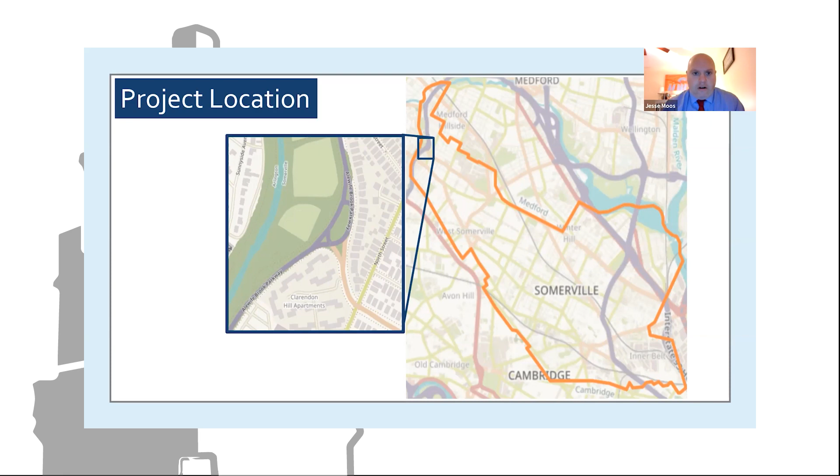This project is as far west as you possibly can get in the city. The limits of it are basically the intersection of Alewife Brook Parkway and Powderhouse Boulevard, but it'll run all the way to North Street as well.

Let's talk about how we get to construction. So everything comes up, we have to have a plan or an idea. We started conceptualizing this back in late 2020.

We had an idea of what we wanted to do, but we needed to get feedback and engage the community. So our mobility team did a few pop-ups throughout 2021, trying to get ideas of how best we could serve this community - not just the people who live around this intersection, but people who really use this as a gateway to Arlington, or if you're coming from Arlington into the city.

We had a community meeting back on July 21st, talking about design, and then the mobility team also did some informational pop-ups later in 2022. And finally, here we are today in February with our construction kickoff community meeting.

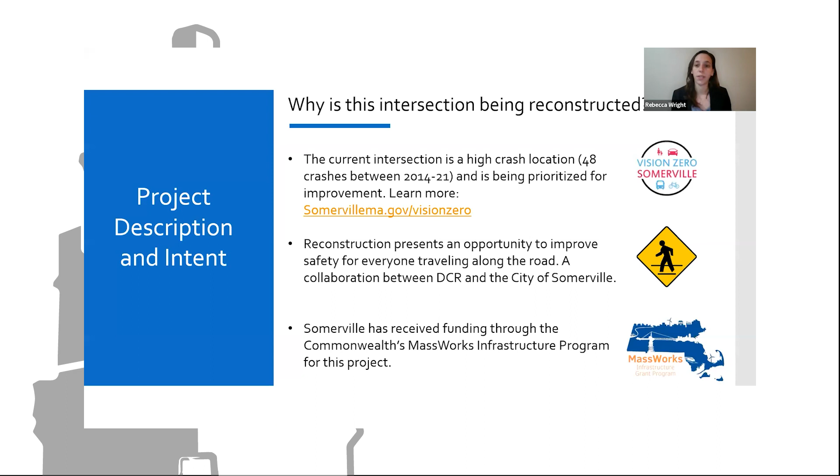This project is funded by the MassWorks grant, so this is not just city funded, we got state funding. This is a really great opportunity for the city to get money from the state and improve our city streets.

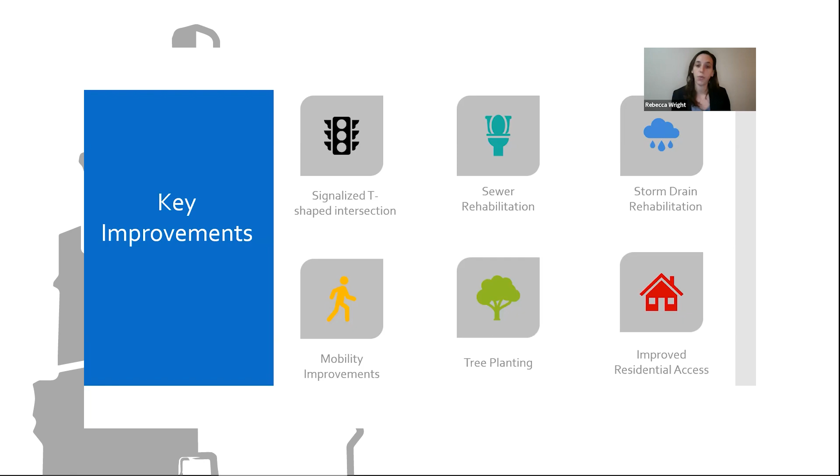The project includes a number of different key improvements: a new signalized intersection, sewer and storm drain rehab, mobility improvements, tree planting, and a new improved residential access roadway.

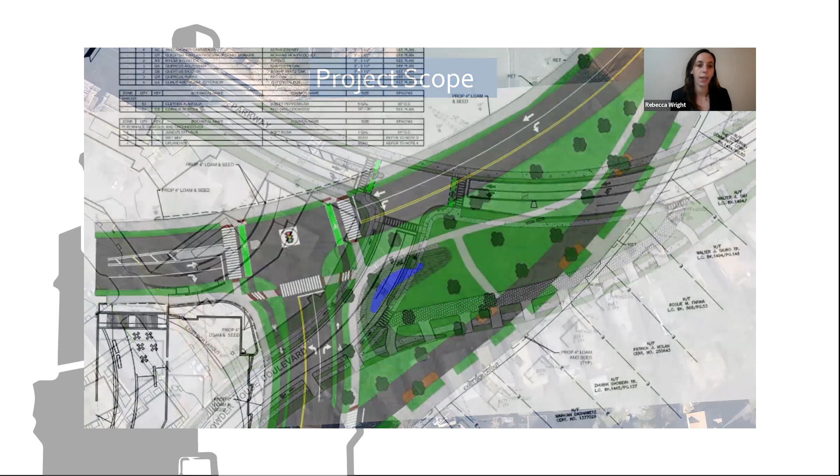I'm really excited about this slide, I put a lot of time into it, and I hope it'll help clear things up for everybody on this call. We have this new residential roadway, which is really a yield street, pretty common in the city of Somerville - you have to stop and pull over and yield for oncoming traffic and take turns.

It is a dead end road for only emergency and service vehicles. Really the only people accessing this roadway are the residents on this road to get in and out of their driveways. This is supposed to be a safe, slower access residential road - anybody using it is really only emergency and service vehicles.

We have these chicanes, which is a traffic safety measure. It's trying to make people slow down and take some turns rather than a straight shot. It's another safety measure, so people slow down on this residential shared street.

We have this raised crossing, which is for pedestrians. From the get-go entering this street, you slow down, and really if you think you're going to bypass the traffic signal to get to Alewife Brook Parkway, you're not saving any time. These safety measures are put into place to slow people down, and it's not a through street by any means - it's a safe residential shared street.

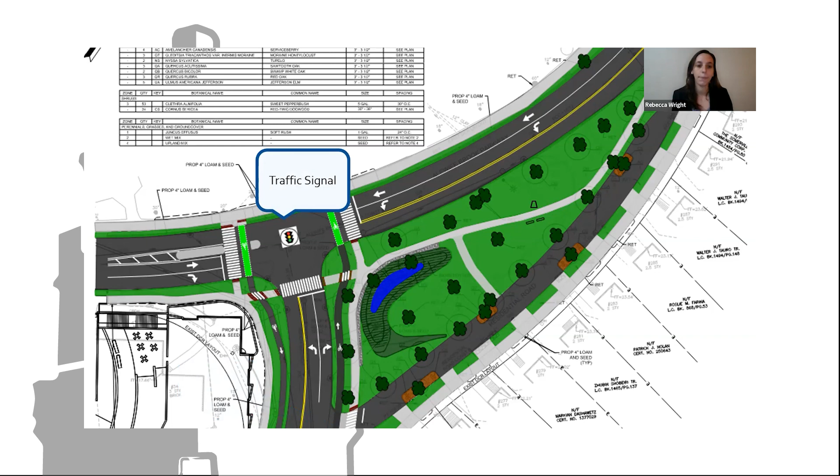We have the new traffic signal, like I mentioned, and protected bike lanes on Powder House Boulevard, one in each direction. They were both sidewalk level, so they are separate from the roadway and from motorists, and it connects to the community path on the other side of Alewife Brook Parkway.

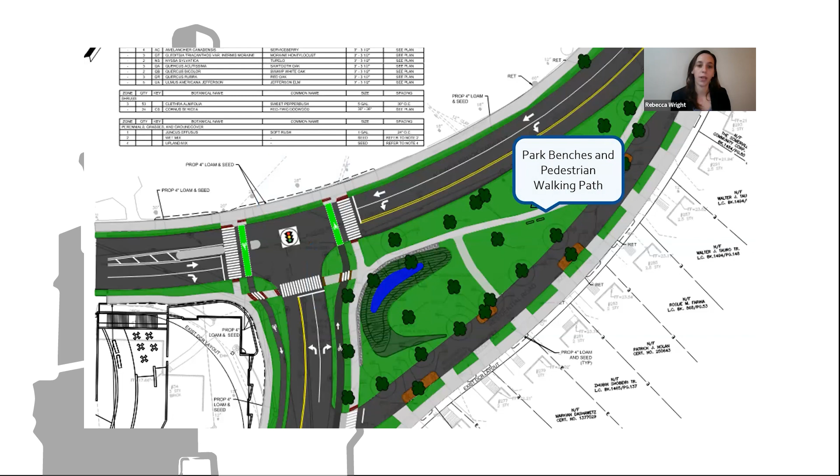We have park benches as well as a sidewalk inside this little park. We have a rain garden that will collect any storm drain - this is a very shallow, about 2 foot deep rain garden. It collects the storm water, and that's about it about the rain garden.

The Koza monument will be maintained. I want to mention this is known as Koza Circle, a memorial to two Somerville brothers killed in World War II, and this monument will be maintained. Actually, I think it will get a little bit more attention in this new location across from the park benches and alongside the walking path.

Continuing down the other side of Powder House, I wanted to point out that the bike path continues on this side as well, then ends at North Street and is now at street level on North Street. But all of Powder House will have sidewalk level protected bike lanes.

We have a new speed hump, which is also a new safety measure to slow traffic down, and we will have a few on-street parking spaces on this side of Powder House Boulevard.

This is the tentative construction schedule. You might have already seen some trees removed, some new tree protection take place this past January. Pretty soon they will be out there next week, starting with some test pits, some erosion control.

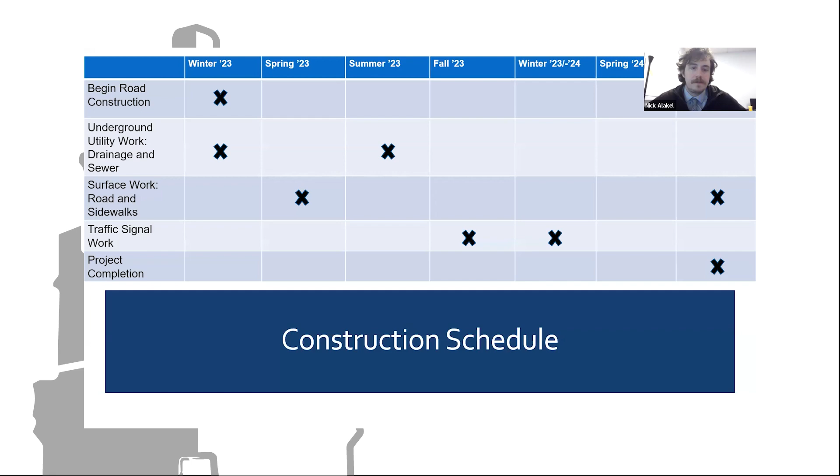I'm going to go back in the slide a little bit, Nick. Yeah, in there. I can't tell from those pictures if it's one lane or if it's still going to remain a two-lane highway. On Powderhouse or on Alewife? Going towards Alewife, actually both ways. In the Alewife Powderhouse intersection, it will be one lane straight through in both directions, and then one turning lane on Alewife. But outside of the intersection, we'll go back to two lanes.

Okay, so it's possible there'll be some slowdown of traffic in that area. Yes, that's what we're hoping for. Sometimes a little too slow.

Any chance of trying to save some of these old trees instead of just destroying them and replanting them elsewhere? Oh, we saved quite a few of the trees. What's out there now is all the trees that will remain.

So the 6 that got removed, Rebecca, some of those were moved to other locations by DCR, right? Those were not included in this count. So there were 5 that were planted by DCR that were transplanted to another location and those were salvaged, but 6 were removed permanently for this project.

But what's out there now that are protected, all of those mature trees are remaining. So we still lost 6 trees. Yes, in the process, yes.

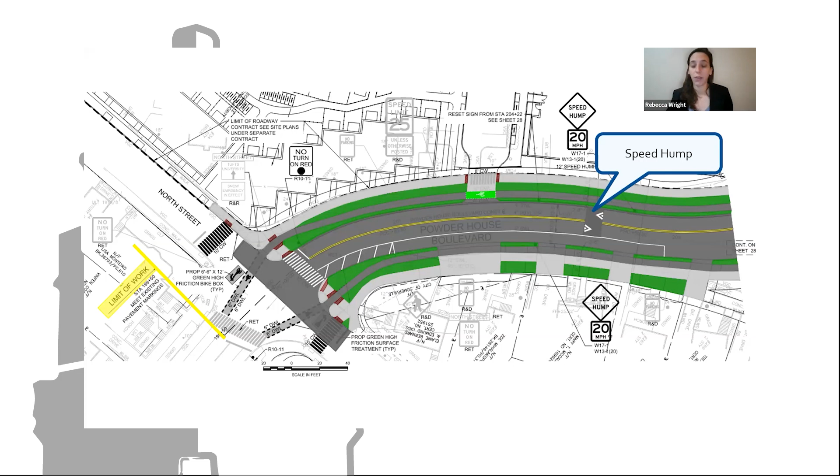But Karen, one of the things we do once construction gets underway is we look to see if there are issues that arise. And if we find that we need to have a police detail at that location, we will discuss that internally and make that decision. But there's never a situation where we go, everything's perfect - construction is always evolving. We're trying to make it as safe as possible.

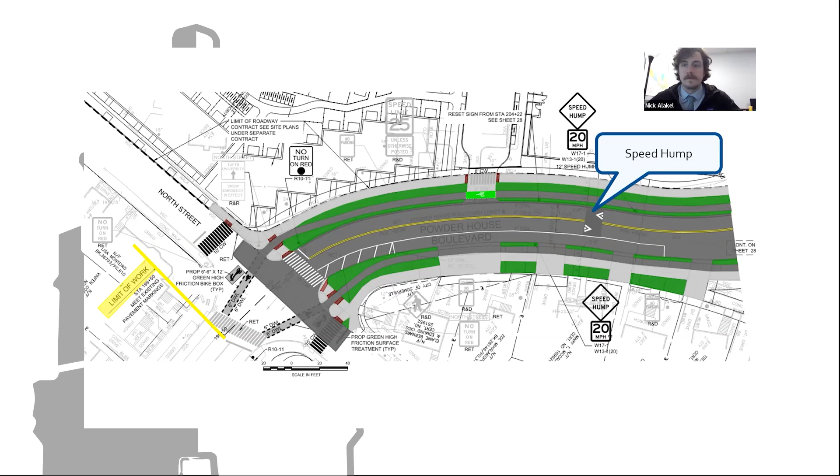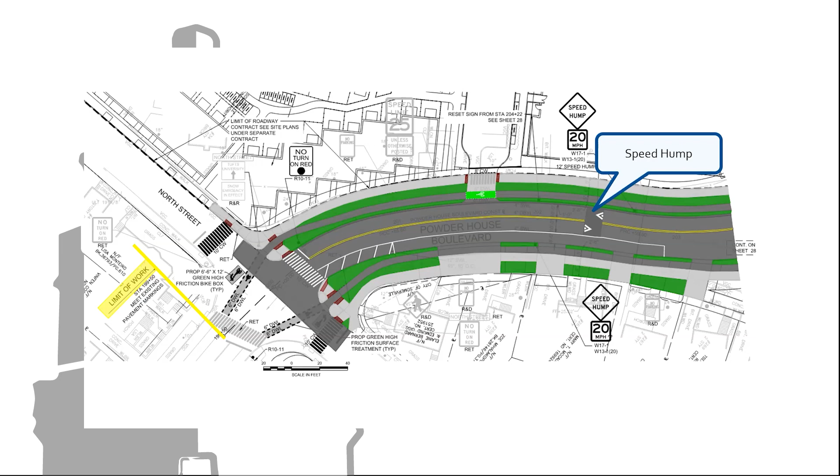Great, thank you. I'm really excited about this redesign, especially the bike lanes. As someone who cycles around this area, it's very scary to go around that rotary. I had a question about the new residential road on Alewife Brook Parkway - will there be on-street parking available there?

No, actually there's no parking on the residential roadway. Okay, thanks. Which is the existing condition right now on Alewife Parkway. So we aren't removing parking, we're just not adding parking. Got it, thank you so much.

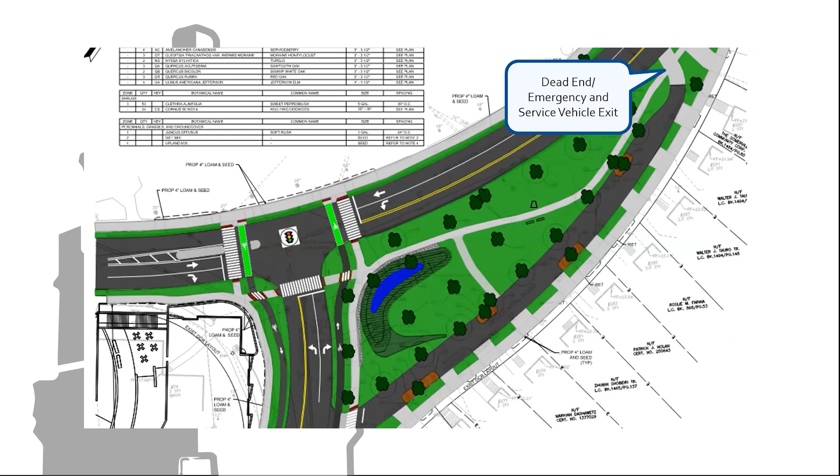Hi, thanks. I just want to agree with what was said earlier about the way the traffic is being detoured, a left going onto Alewife to take a left onto Broadway. Maybe it's because I live on the side of this construction, basically on the other side of the West Somerville School. I'm looking at it from a standpoint of Stop and Shop. People are going to have to go down Powder House Boulevard to take a left onto Alewife, to take a left into Stop and Shop. And even if you did that today, there's a double line, so you can't take a left technically into Stop and Shop. I'm thinking commercial wise and business wise, the flow of traffic would probably be wiser to go the other way, because this looks like it's taking traffic out of the city rather than helping the people in the city. That was basically it.

Yeah, Colleen, we can look at that. Broadway's two ways, so you could get to Stop and Shop going the other way as well. But this is good feedback that we're getting about that left turn.

I guess, is North Street a one-way? Maybe that's what I'm getting confused at. The yellow lines on North Street pushing towards Powder House, does that mean that's a one-way? No, the yellow is just the detour. I thought this was a rotary circle thing, like slow traffic. No, it's just the detour for people traveling southbound on Alewife. You can't turn left onto Powder House, so you have to follow the yellow. Okay, but you can go up North Street and take a right on Broadway. All right, thanks.

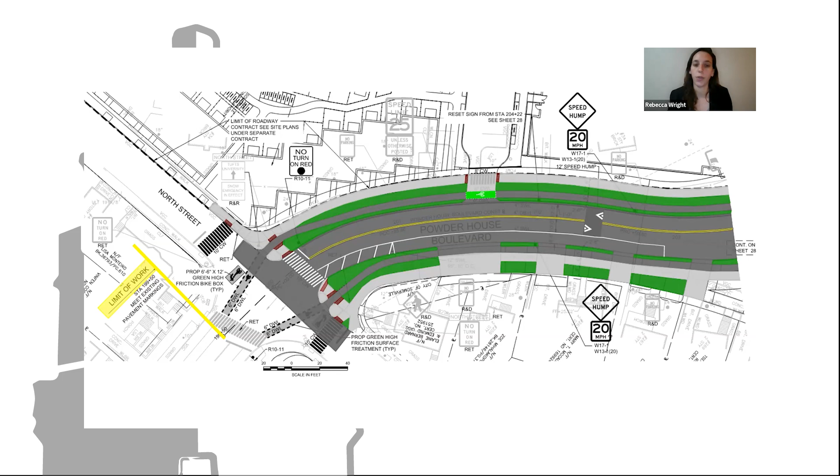And then the other question was, you said there was a picture of this end of Powder House where it's bumping into North Street, and said there were 4 on-street parking spaces. Are there other parking spaces on the rest of Powder House Boulevard? On-street parking? No, what you see in this picture is the only on-street parking. All the way to Powder House Circle?

Square? The other direction? Between North Street and Alewife Parkway, yes. No, the other direction on Powder House, between North Street and College Ave.

That is not in the scope of this project, so no. Oh, okay, so we're not eliminating any parking outside of this little spot. Okay, all right, thank you. Got me confused there for a second. All right, well thank you, Judith.

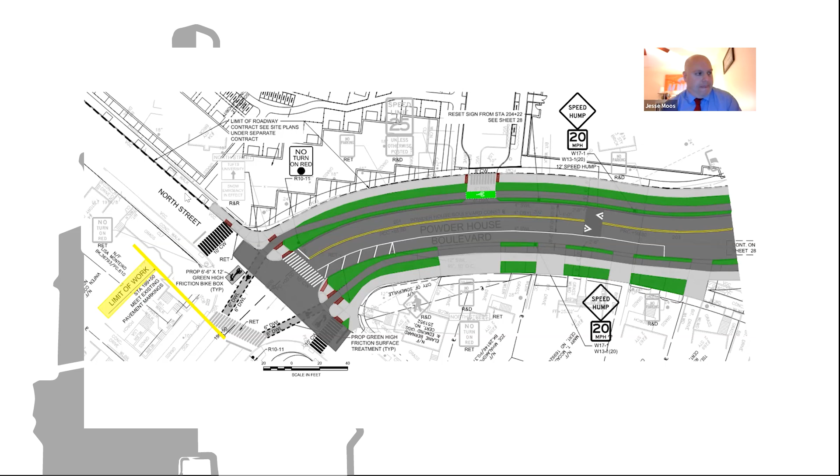Hi, thank you for your time tonight. I appreciate the information. I'm concerned that the difficulty will be in making a left turn from Alewife onto Broadway, and how dangerous that could be. The idea that you're not going to install a different traffic light really concerns me. I think the volume of traffic really demands that you change the traffic light to accommodate a left turn onto Broadway. I'm really surprised that's not in the plans.

So I appreciate that comment. If you spend any time at that intersection looking at the amount of traffic, and then take into consideration there's going to be a sudden increase in left turns, it does demand some adjustment to the traffic light.

So I absolutely appreciate that comment, and it's obviously been said multiple times this evening. The reason we have these meetings is so we can get these comments from the people who live in this neighborhood, so if there's something we haven't thought of, it's right in our face. We're going to go back to our project team and say, hey, this is the feedback we got, we need to make some adjustments. Thank you, appreciate that.

It's already a bad turn. All right, next up we're going to hear from Kathleen Evans. Kathleen, you should now be able to unmute.

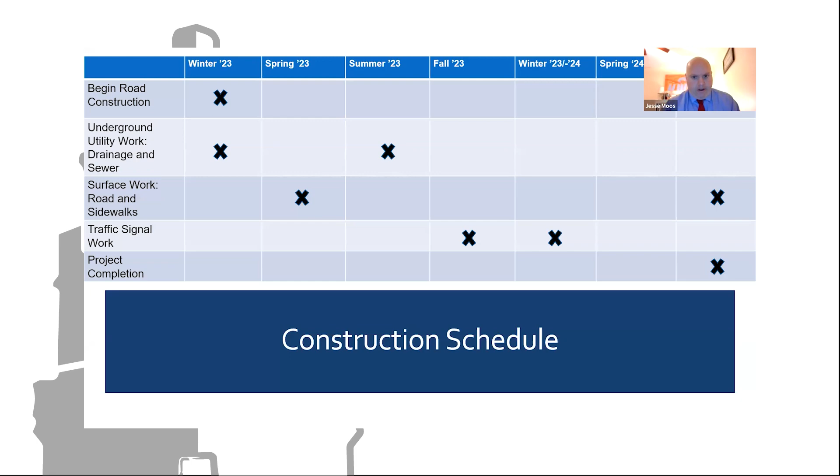So the parking we were talking about earlier was the Alewife Brook Parkway, where we are not removing any parking because there wasn't any to begin with. There are some spots being removed on Powder House for the construction project, but we do retain these, and there also are houses that have their own driveways. If they didn't have driveways, we could actually put more parking in, but we hope people are using their driveways to make better use of the street. If there is no driveway parking, the street is the only resource, and what you have on the opposite side of Powder House is all parking, now it's a bike lane with grass on either side, so we lose all that parking on that side. Correct, there are some spots being removed for safety.

Is there any way to add parking to the new street? Unfortunately not. Okay, thank you.

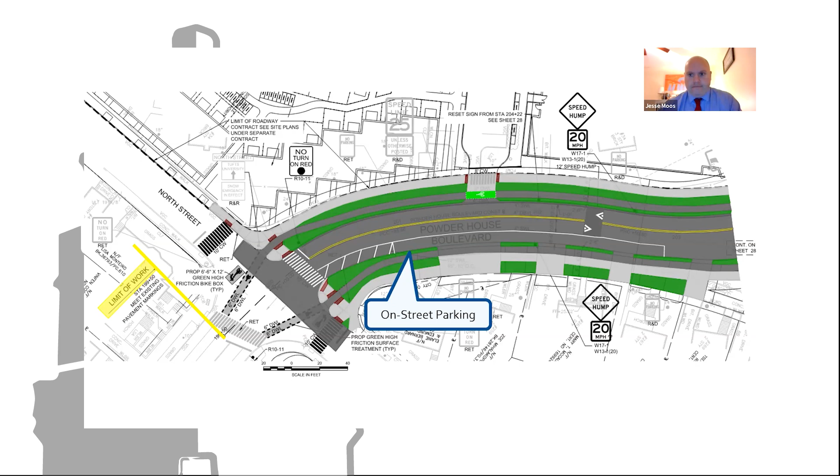With the picture that showed a 24/7 detour, is that a permanent detour from Broadway to North Street? Are we ever going to be able to access Powder House without having to go down Broadway?

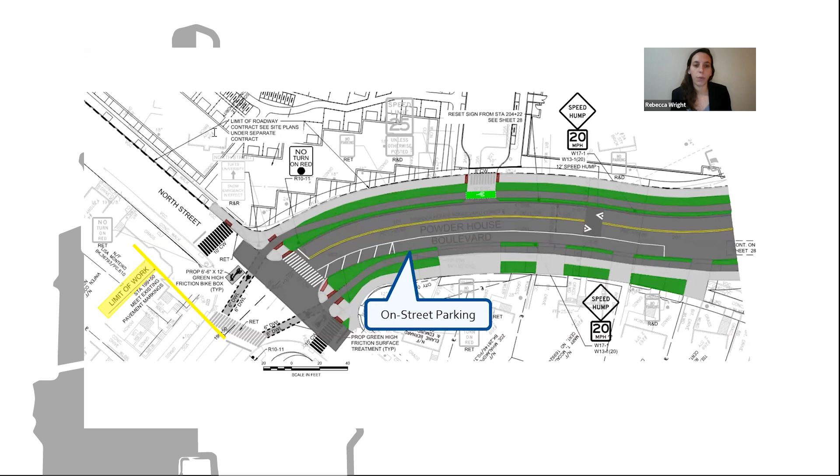That detour will be in place. It's not permanent, but it's about a couple of months' duration. I spoke to the contractor today. He believes it will begin in a couple of weeks and go through until the end of summertime. But it is coming back so that we can go down Powder House from Alewife.

After they finish the construction activity that requires the detour, they'll be able to open it back up. Thank you, that was my question.

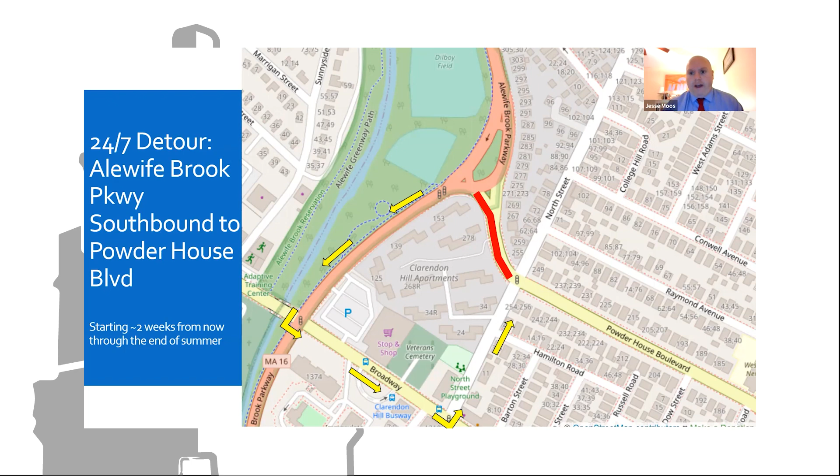Sure. One of the things we do when we go through the design process, we meet with Chief Breen, and we talk about if we are going to make roads smaller than what they are, we want to make sure that a fire truck can get down there. So that's kind of the standard we go by. We don't do anything smaller than the width of a fire truck. So if you think of it that way.

Okay, thank you very much. And thanks for this meeting, it's been really good. Thanks, Megan.

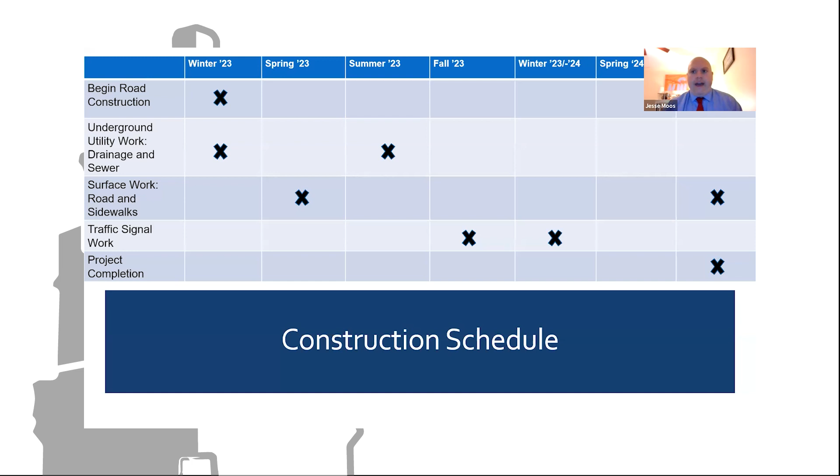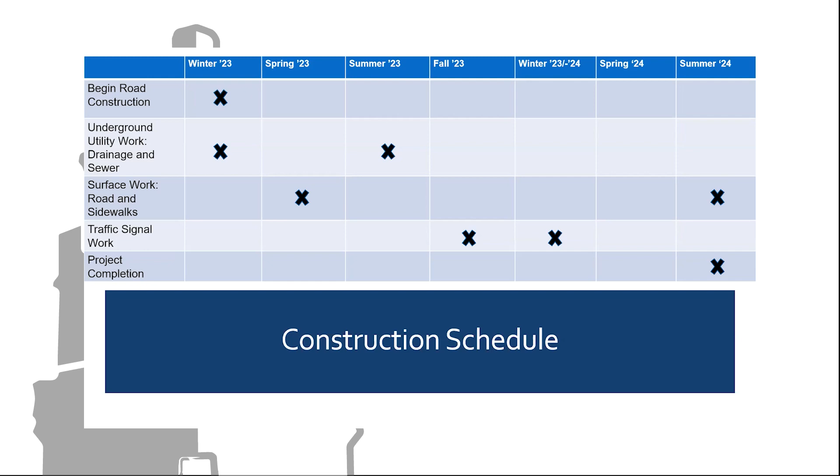Got you. Yeah, and then just this is a comment. I think given that it's like ways out, continuous communication and engagement is really going to be key as we move ahead, so that is something I just want to put that on your plate. Okay, thank you. Thanks, Will.

Karen, do you have another question for us? Karen, you should be able to unmute if you have another question. Am I unmuted? Yes. Oh, I'm sorry, I just had a quick question. Are you eliminating the pedestrian light across from the playground?

Which playground? On Alewife, kind of diagonally across from Stop and Shop? That playground.

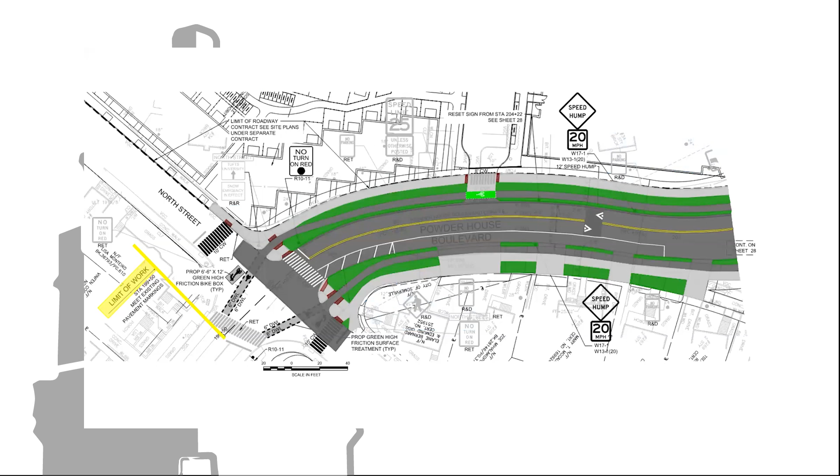I think that's outside of our scope. No, it's there, it's there. Nope, not on that slide. It would be kind of where that circle is, where there's an arrow in the green space. See where it says Clarendon Hill Apartments? Then kind of like 11 o'clock from there. Oh, like the North pedestrian, the North Street playground right there? No, not North Street, on Alewife Parkway, where the baseball field is, the greenery. Yeah.

There's a pedestrian light there. No, our only work is in this intersection at Powder House and Alewife Parkway. This one, there, this is it, right there. So you're leaving the pedestrian light that's in between the slide you just showed me with the new traffic signal, and the intersection of Powder House, Alewife, and Broadway. Correct, we're only working on the intersection. We're installing a new traffic signal at Alewife Brook at Powder House.

Okay, that was my question. I use that light all the time. That was it, okay. All right, well thanks, Karen. Will, do you have another question? Oh no, sorry, I should have put my hand down. I'm sorry, all right. That seems to be, does anyone else have another question? If not, we can wrap up for the evening.

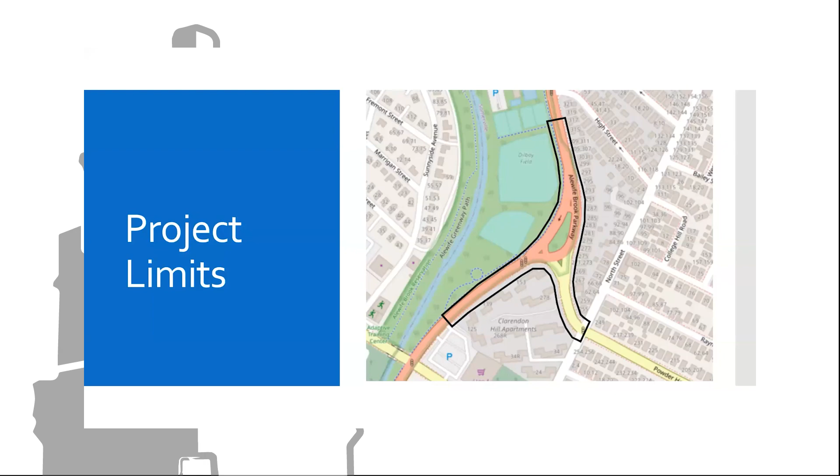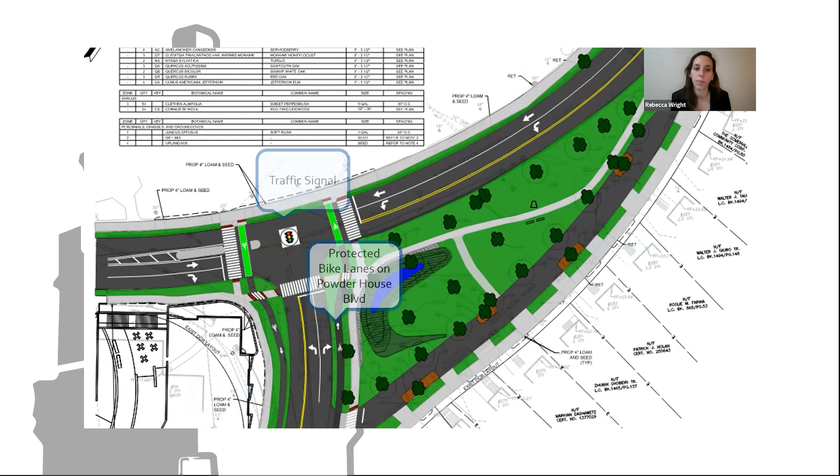Scott Smith: Yeah sorry, I threw something into the Q&A. Just a thought is, you may make the direction of Powder House during construction the other way, the detour might become a lot easier. I don't know if that's something you considered. What, like go up the hill rather than down the hill? Like a temporary, yeah, just a thought. It may not be a good idea. Just consider it. Noted, thanks Scott.

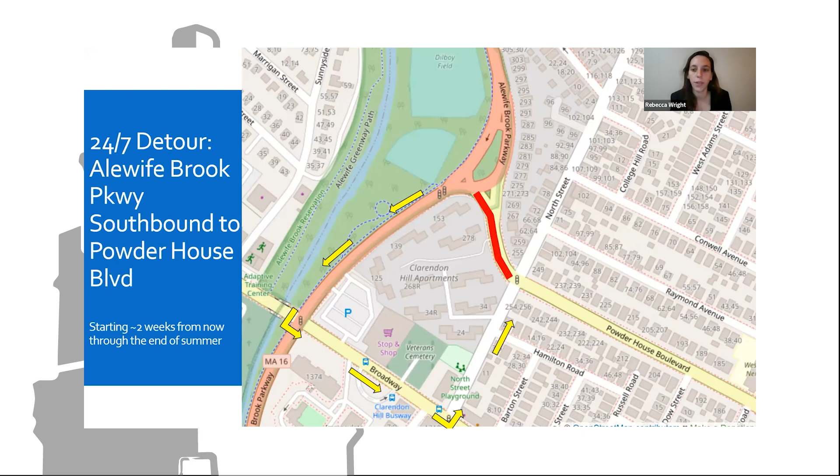Thanks Scott. All right, looks like Nick has another question for us. Nick, you should be able to go ahead and unmute. Yeah, how you doing? So I'm actually questioning your answer to the crosswalk. So when you were flipping the slides, it was actually an aerial that showed it, and it only looks like it's 20 feet or so from the crosswalk that you're going to put in, so it really doesn't make sense to keep that light and crosswalk there.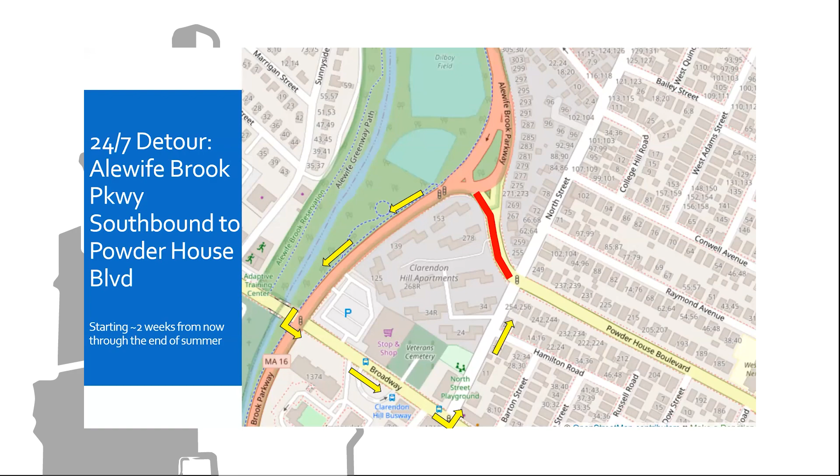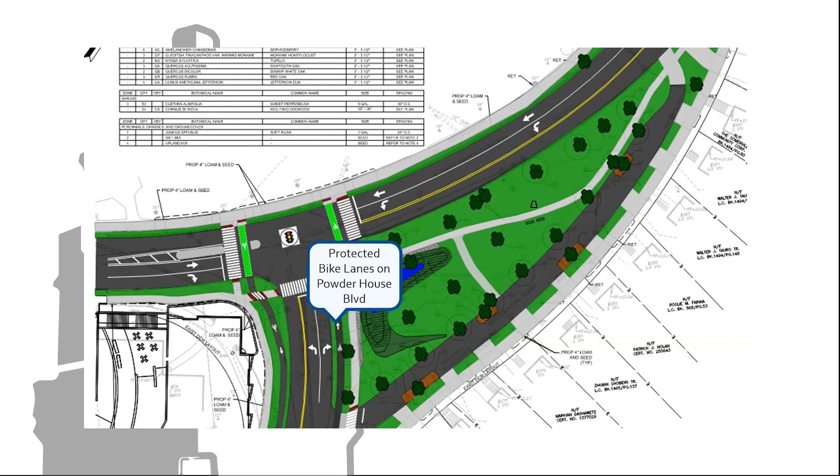Nope. There was an aerial shot that I saw. That one, this one? See the crosswalk. So look at that green line on the left, and then follow it a little more, you can see the crosswalk there, underneath, right on the parkway, the left. Yeah, so we're not keeping that.

Okay, yeah, so you had said earlier that you are. Okay, sorry, I just wanted to clarify because I thought that they were just too close. Okay, thank you, that's Karen, yeah, Karen caught me off guard with that question. But yeah, if you can see that, there's like an overlay over there. Yep, that crosswalk's going away. Sorry, Karen. Well, the new crosswalk is going to have its own pedestrian signal. Right, yeah, right, yep, makes sense. Okay, thank you, thanks Nick.

Looks like Ian Woolishin has another question. Ian, you should be able to unmute. Yeah, one more quick thought about that left turn detour. I sometimes go up Powder House to get into West Adams, Conwell area. Usually if I'm coming from like Arlington down Route 3, is there any thought about putting detour signs up there to say go to Boston Ave and North Street or any of the other cut-throughs from the other way? I don't know if that helps everyone, but it might help the people in the Somerville Medford area that are just trying to get home versus cutting all the way through. I don't know if that makes sense.